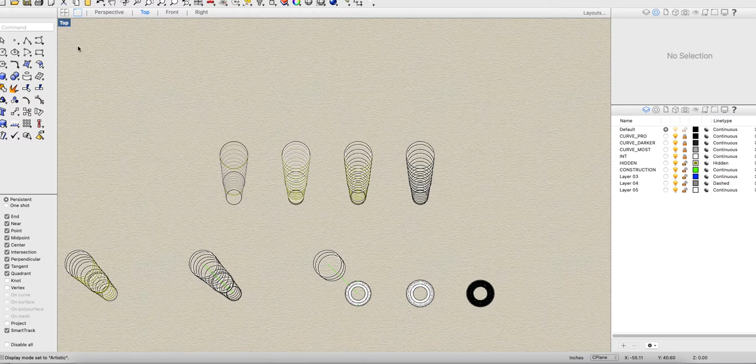So I have my cup. I didn't import it into Rhino because I just measured the different diameters, kind of quick and dirty. Hopefully your students are being way more precise than what I'm going to show you in this little video. But let's go right here to shaded view.

So I'm going to do my 4 view. So you can see a lot going on here. Kind of started to model it out over here. See them, this is what they look like over here.

Ooh, I have everything locked. You can see right here, right? Like I've already started, and you've got to get your students to do this as well. I've already started to create a bunch of layers.

Some of these aren't that helpful in the beginning, but as you keep modeling, you're going to keep on creating layers. It's going to be so helpful. Right, so if you look over someone's shoulder and everything is on layer 01 or on the default layer, you might want to warn that student that could cause loads of problems and slowdowns later on.

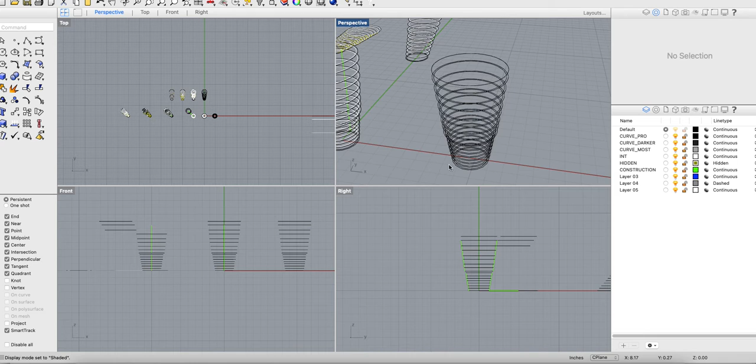So I started modeling it here, and then I even thought I would model the interior curves as well, so that's over here too. I immediately put those on a different layer. However, I did group them in little couples, so at each profile level, the interior and the exterior curve are grouped together.

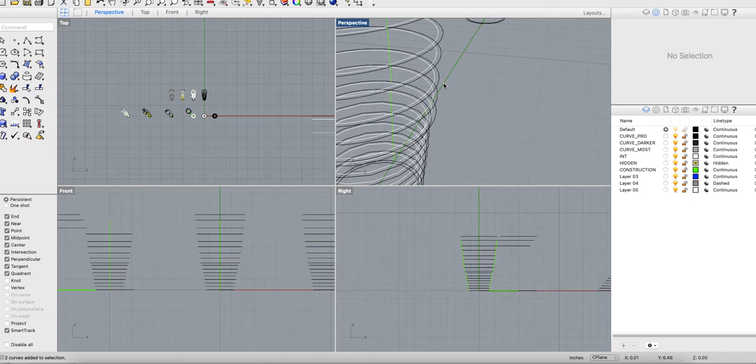That's helpful because when I shut them off, I can still manipulate the things that are in groups even if they are switched off. I think that creates a lot less confusion in terms of what you're looking at. So there's the one I just copied, and if I turn the interior layer on again, the hidden thing was copied over.

2 things to keep in mind. Group command is not the same as join. It's not creating polysurfaces or polylines. So make sure your students understand the difference between group and join.

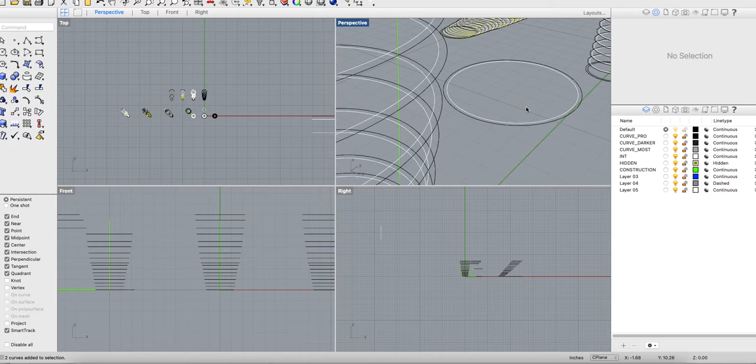The other thing to remember is to be careful with group, because if you switch off a layer, you could be manipulating things that have been switched off for many, many hours, and then you switch that layer on again and realize because loads of stuff was in a group, it's all been deleted or deformed in ways that you didn't want. So group can be helpful, but can be a double-edged sword. Just tell your students about that as well.

I kind of started doing profiles in another dimension here. Again, your students will probably be doing profile in 2 dimensions. This I kind of just use as 2 helper lines. I mean, it's basically a cylinder.

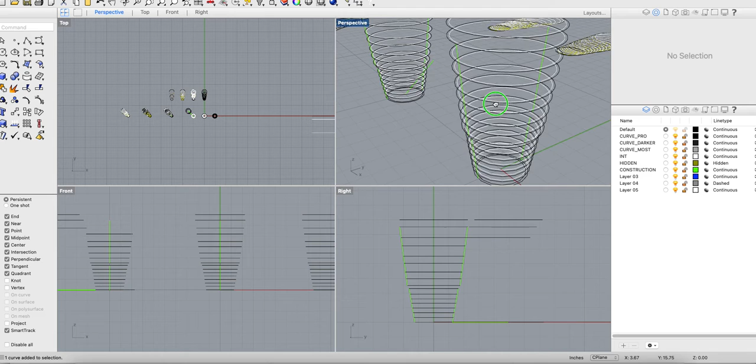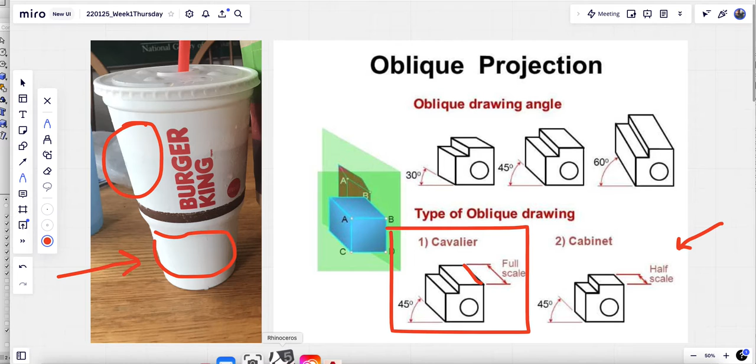That's getting smaller, but there were some interesting bits at the bottom, like it turns into a polygon shape as opposed to a circle, more near the top. So I wanted to sort of differentiate this area versus the top area, it's a little bit different in shape. Things like that will make the model way more interesting, as opposed to just having it be straight sections. So there's that, and I'm over here.

Okay, so now what I'm going to start to do is, the best thing is I'm going to take this thing that I've created.

I'm going to delete this. This is what I started doing over here. Okay, and in fact, I'm going to delete all of that.

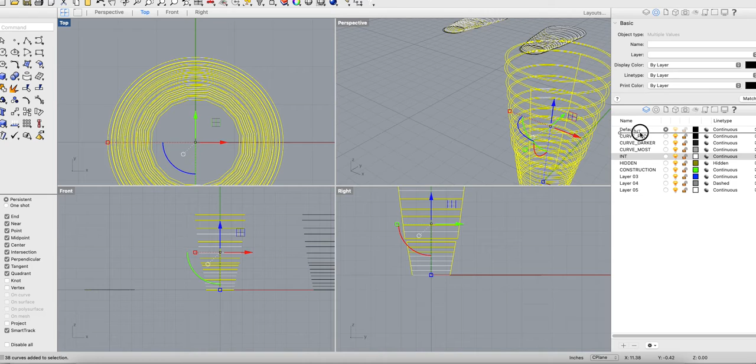Okay, so I've got my interior curves here. I'm gonna just move this up. Okay, now that I have that, I'm gonna start to build my oblique drawing in the top view.

However, before I can do that, I decided back here that I was gonna do this one with the 45-degree angle, and it's full scale. I know that my cup is 7 inches tall because I measured it with a handy ruler.

So I'm gonna go into my construction line layer. I'm gonna make a helping construction line, starting right over here. I'm gonna have it be 7 inches tall because that's how tall my cup is. Hit enter, and then I'm gonna have it go up at a degree of 45. So I do my less than 45.

Okay, and just to be sure, now I have the beginning, good, 7 inches. And now all I'm gonna do is take the curves and start moving them up. So that's the top one.

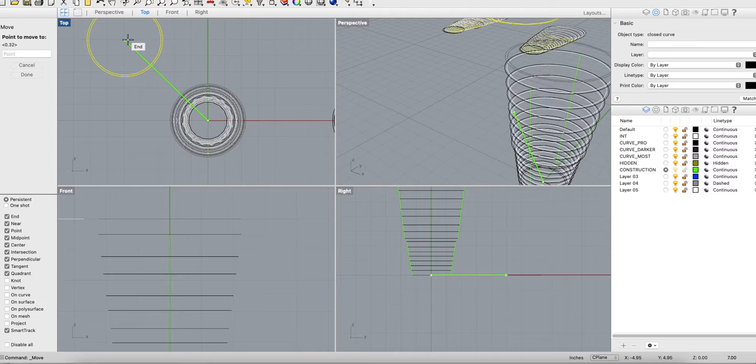I'm gonna move that all the way over here. Okay, and I got the next one. How far should I move that one over? Well, what is this? That's behind, sorry.

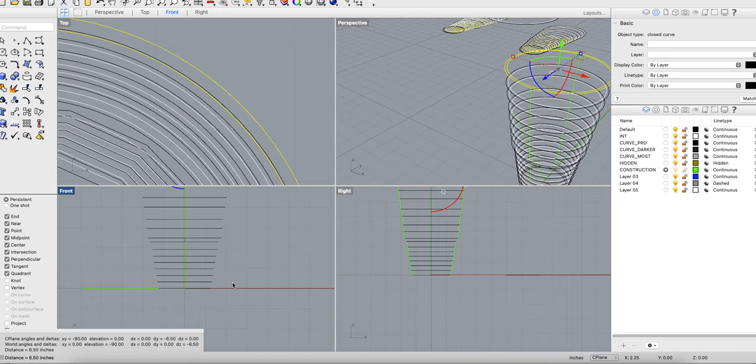At the next one, how far should I move that one over? Well, I can just measure it. I'll go over here to front view, I have my ortho and my grid snaps on. Let's measure how far away this is. 6.5. So I'm gonna come over here and I'm gonna move that.

6.5, less than. That's the next one. I'm going to keep doing that with this one here.

Well, how high is that one? How far should I move it? This is why it would have been good if I had more of a procedure when I was setting up these profile curves rather than doing it like a haphazard mess. Maybe a good warning for your students, but anyway, that's 5.77, not ideal, but whatever.

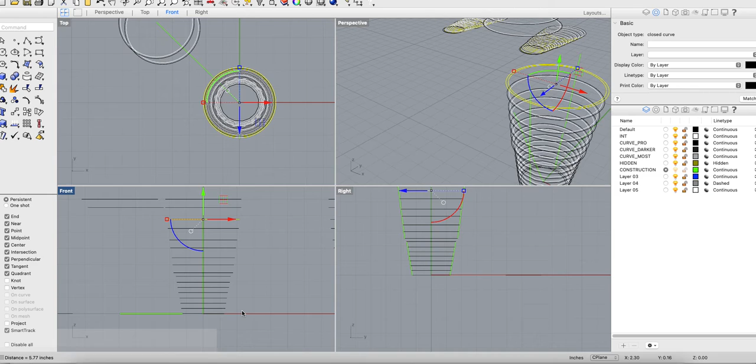Moving that over here. 5.77, less than 45.

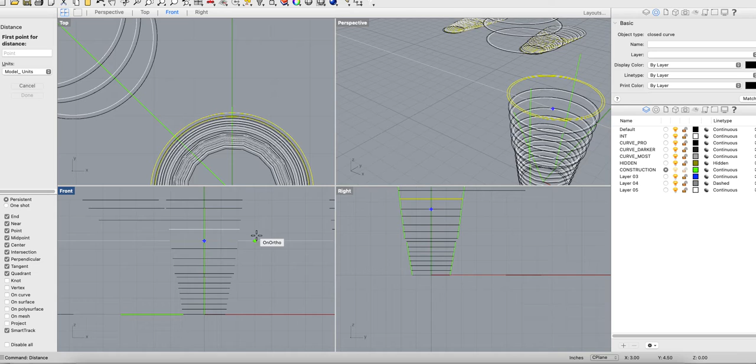Right. How high is this one? Again, this is very disorganized. I should have had these profiles be at much more regular intervals. This is at 5.21, not happy about that, but anyway, move that.

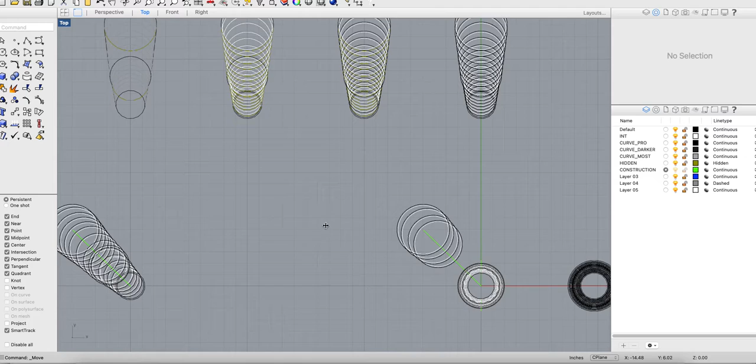There you go. Okay, and so now I'm just gonna do baking show style. I'm gonna move over here where the whole thing is kind of done. Okay, so I still have all my bits here. It's just kind of starting to turn into an oblique drawing.

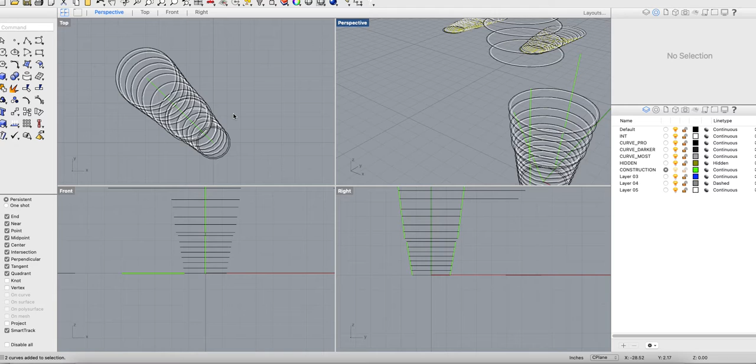Now, there's an important step here before I can start drawing on this, like in 2D, where you'll see this thing that I've made over here in perspective view. Oh, it's over there. An important step that I forgot, which has been deleted, is... I don't know where that went.

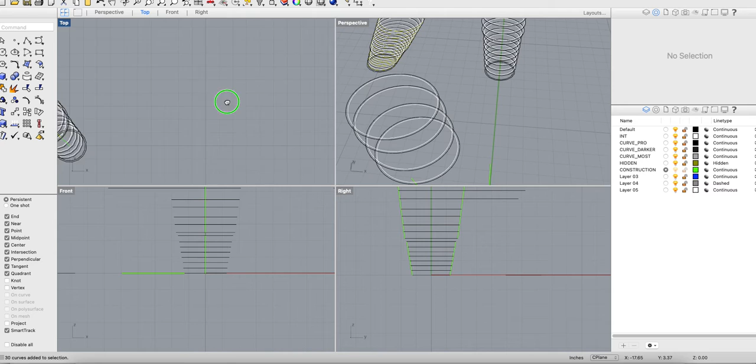But okay, that's okay. What's gonna happen here is, if you look over here, this is what I was just working on, these bits that I was moving over, the part that I just started. You can see it's all floating around in space. That's not a big deal because you're looking at it over here in top view and you can't really tell. However, when you go to trim and split and treat it like a drawing, it's not gonna work because they're not on plane with each other.

So I just channel my inner Luke and I take all of these and I do project to C-plane.

I would probably actually copy them first. I love doing my copy paste, I don't ever like destroying anything. And then I would maybe select all, project to C-plane. Now I can just go ahead and delete the input object.

And now you can see everything has been flattened. That's an important step before you start drawing. Obviously, you can't do trims and cuts or anything like that because Rhino's not going to be able to find any intersections when everything is floating around in space like it is here. So I project to the plane.

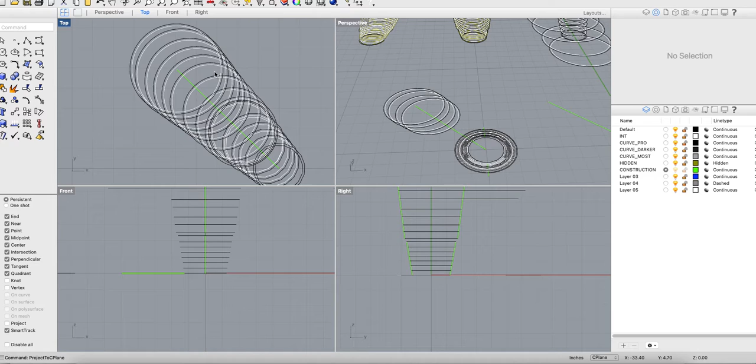That's an important step. I also, at some stage, now I kind of can go over here. It's all projected onto the same plane. And now I can just treat it like a 2D drawing.

An important step here, though, I would say, is to ungroup everything, because if things are still grouped and you start trimming and splitting, remember the warning I gave before, all kinds of things are going to get split and trimmed that you don't want. So I would ungroup it at that point.

Come over here, this is the ungrouped one. You can see things are separated now. Now I'm using the split command to try to put things on different layers over here, so that making the drawing will become easier later on.

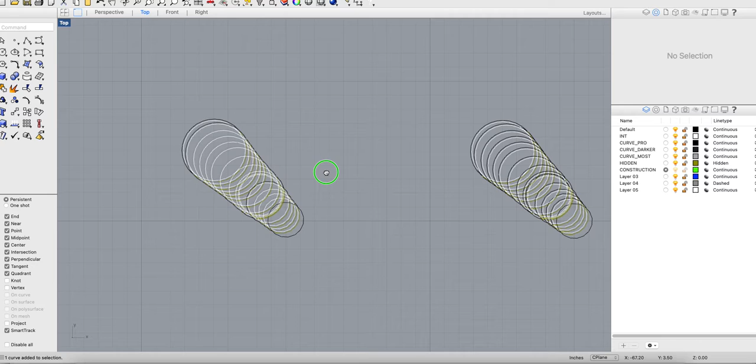Okay, and I have my hidden lines coming up over here. You can even see just between these two, things are starting to become more clear in the one on the left. Things are starting to become more clarified.

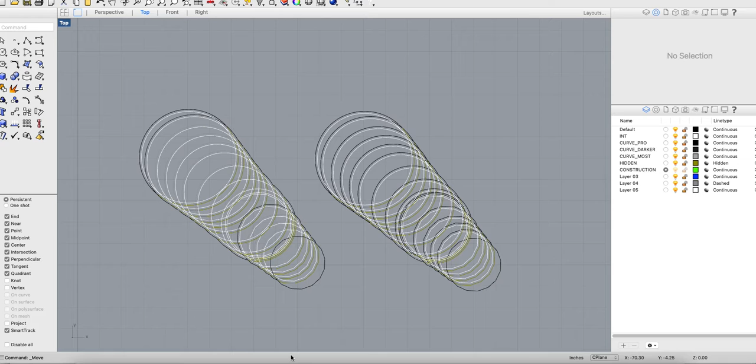And then in the last stages, when you've manipulated this and have things switched on and off as you like, you can, at the end, maybe on Tuesday, start showing people how you would take things into Illustrator and start manipulating them there. Keeping in mind that all the layers are maintained here.

And you can play around with how thick and thin you want everything to be, using the line weight rules that I assigned. But I mean, these are things again that you're quite familiar with.

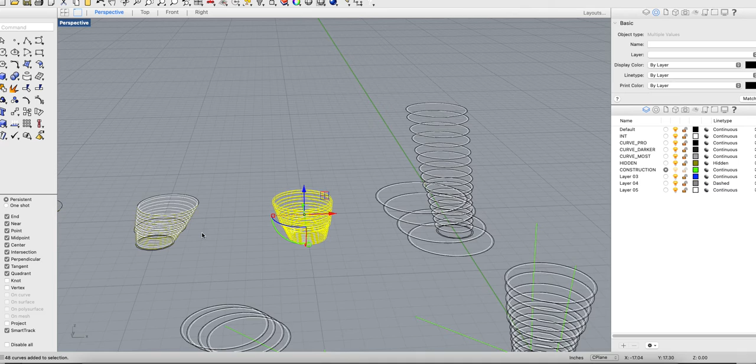I also have, if you didn't want to do the 45-degree angle, you could just have it be oblique, or create the drawing by having it go straight up. It's the same process. You build it up like this, manipulate it that way. I can show you this one too - building it up, and then coming over here, projecting it to the C-plane, organizing, etc.

So this is like a really quick and dirty tutorial, not the greatest, but this was just my process in doing it. I feel like, from what I'm seeing on the Miro board, different folks are doing different things. Some people are kind of seeing it this way. You can introduce this to them on Tuesday. If they've started a different process to get to their drawing, that's fine as well.

But I think the things to remember are: one, taking an object from 3 dimensions, describing it using planar curves in 2 dimensions, manipulating those 2-dimensional curves in 3D space to then get a 3D representation of this object, and then bringing that back into a drawing and showing the most interesting bits, all the while being super organized with your layers, being super clean, understanding what the different curves are, and knowing where they're coming from and how you'll use them later. Also, major commands are going to be trim, split, copy, polyline, things like that - going to be super important.

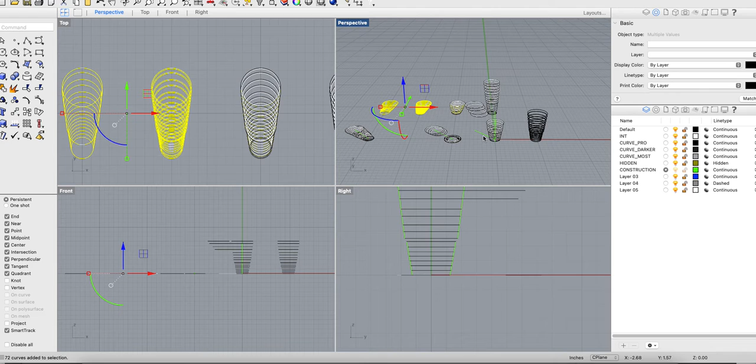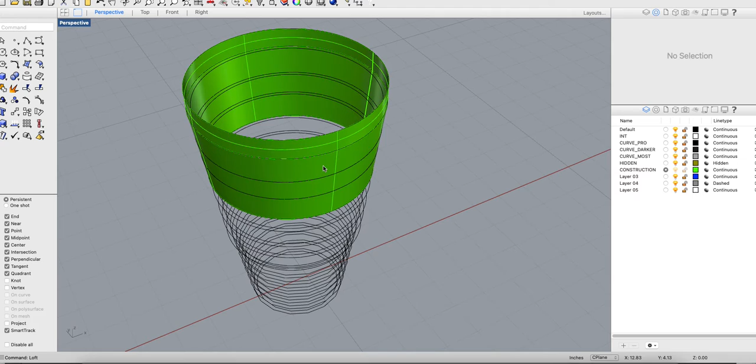And if you want, it's totally fine to play around and show your students the surface commands. You could actually just start taking things and showing students how Rhino can create surfaces in other ways. That's totally fine along the route, because we're absolutely going to be doing that. But for this exercise, we're mainly interested in the curves that generate those surfaces and how we can manipulate that.